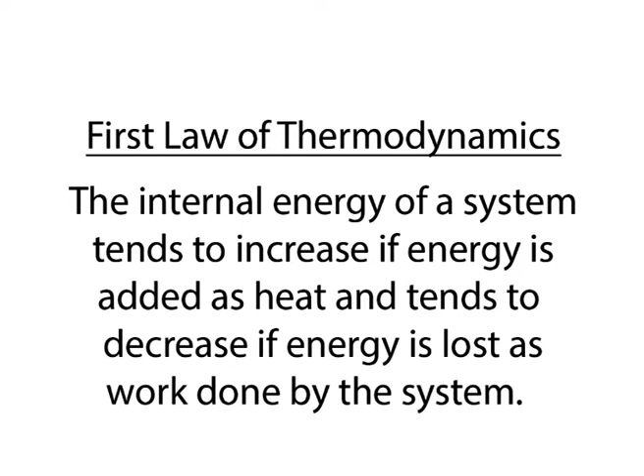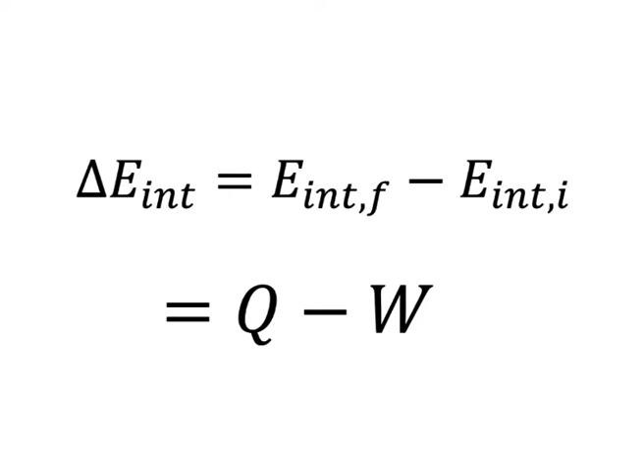In the earlier lectures, we applied the first law of thermodynamics or the conservation of energy principle to processes involving closed and open systems. It was pointed out repeatedly in those lectures that energy is a conserved property and no process is known to have taken place in violation of the first law of thermodynamics. Therefore, it is reasonable to conclude that a process must satisfy the first law to occur. However, satisfying the first law alone does not ensure that the process will actually take place.

As this example here explains, it is a common experience that a cup of hot coffee left in a cooler room eventually cools off. This process satisfies the first law of thermodynamics, since the amount of energy lost by the coffee is equal to the amount gained by the surrounding air.

Now let us consider the reverse process, the hot coffee getting even hotter in a cooler room as a result of heat transfer from the room air. We all know that this process never takes place, yet doing so would not violate the first law as long as the amount of energy lost by the air is equal to the amount gained by the coffee.

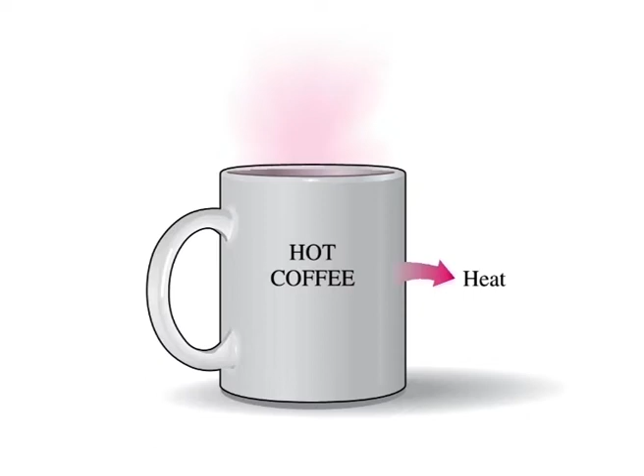In another familiar example, consider the heating of a room by the passage of electric current through a resistor. Again, the first law dictates the amount of electric energy supplied to the resistance wires to be equal to the amount of energy transferred to the room air as heat. Now let us attempt to reverse this process. It will come as no surprise that transferring some heat to the wires does not cause an equivalent amount of electric energy to be generated in the wires.

Finally, consider a paddle wheel mechanism that is operated by the fall of a mass. The paddle wheel rotates as the mass falls and stirs a fluid within an insulated container. As a result, the potential energy of the mass decreases and the internal energy of the fluid increases in accordance with the conservation of energy principle. However, the reverse process, raising the mass by transferring heat from the fluid to the paddle wheel, does not occur in nature, although doing so would not violate the first law of thermodynamics.

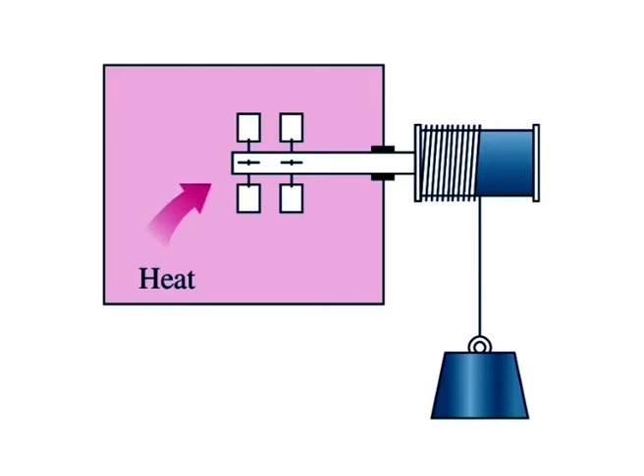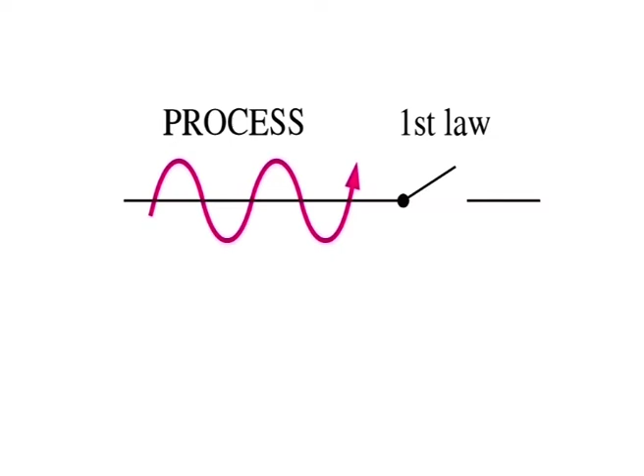It is clear from these arguments that processes proceed in a certain direction and not in the reverse direction. The first law places no restriction on the direction of a process, but satisfying the first law does not ensure that the process can actually occur. This inadequacy of the first law to identify whether a process can take place is remedied by introducing another general principle, the second law of thermodynamics.

The use of the second law of thermodynamics is not limited to identifying the direction of processes. The second law also asserts that energy has quality as well as quantity. The first law is concerned with the quantity of energy and the transformations of energy from one form to another with no regard to its quality. Preserving the quality of energy is a major concern to engineers, and the second law provides the necessary means to determine the quality as well as the degree of degradation of energy during a process.

As shall be discussed, more of high temperature energy can be converted to work, and thus it has a higher quality than the same amount of energy at a lower temperature. The second law of thermodynamics is also used in determining the theoretical limits for the performance of commonly used engineering systems such as heat engines and refrigerators, as well as predicting the degree of completion of chemical reactions.

Thermal energy reservoirs. In the development of the second law of thermodynamics, it is very convenient to have a hypothetical body with a relatively large thermal energy capacity that can supply or absorb finite amounts of heat without undergoing any change in temperature. Such a body is called a thermal energy reservoir or just a reservoir.

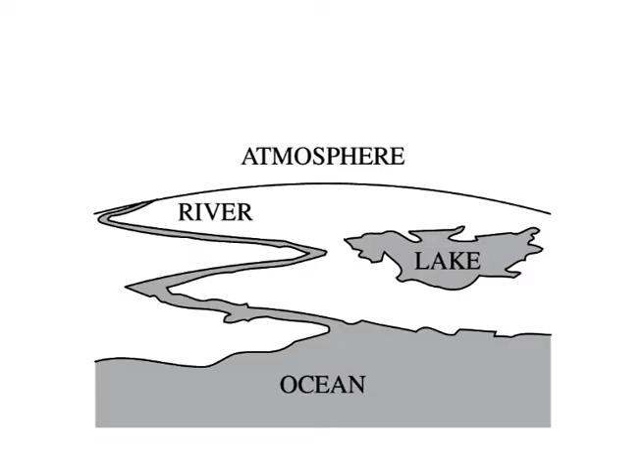In practice, large bodies of water such as oceans, lakes and rivers as well as the atmospheric air can be modeled accurately as thermal energy reservoirs because of their large thermal energy storage capabilities or thermal masses. The atmosphere, for example, does not warm up as a result of heat losses from residential buildings in winter. Likewise, megajoules of waste energy dumped in large rivers by power plants do not cause any significant change in water temperature.

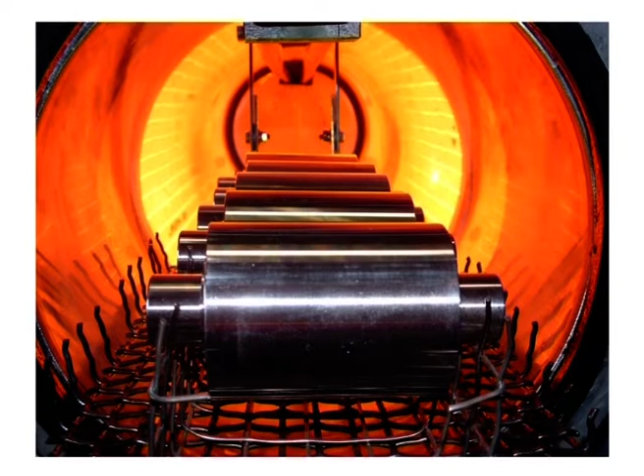Another familiar example of a thermal energy reservoir is the industrial furnace. The temperatures of most furnaces are carefully controlled and they are capable of supplying large quantities of thermal energy as heat in an essentially isothermal manner. Therefore, they can be modeled as reservoirs.

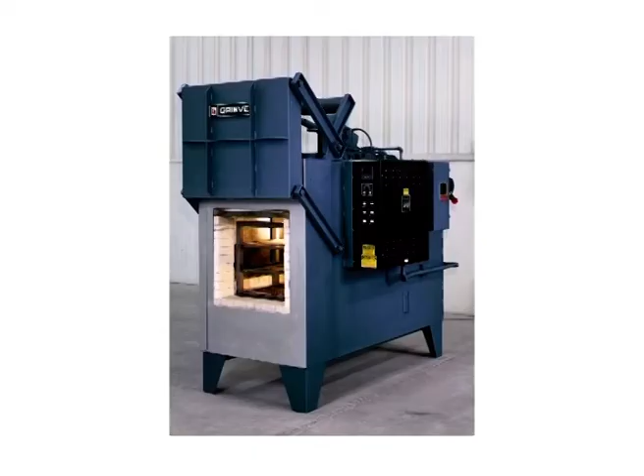A body does not actually have to be very large to be considered a reservoir. Any physical body whose thermal energy capacity is large relative to the amount of energy it supplies or absorbs can be modeled as one. The air in a room, for example, can be treated as a reservoir in the analysis of the heat dissipation from a TV set in the room, since the amount of heat transfer from the TV set to the room air is not large enough to have a noticeable effect on the room air temperature.

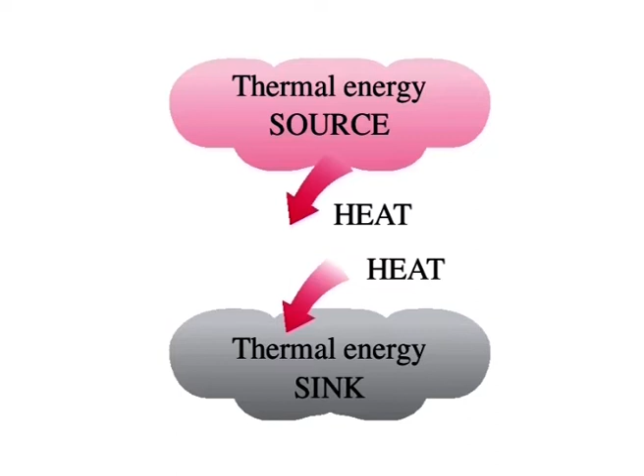A reservoir that supplies energy in the form of heat is called a source, and the one that absorbs energy in the form of heat is called a sink. Thermal energy reservoirs are often referred to as heat reservoirs since they supply or absorb energy in the form of heat.

Heat transfer from industrial sources to the environment is a major concern to environmentalists as well as to engineers. Irresponsible management of waste energy can significantly increase the temperature of portions of the environment, causing what is called thermal pollution. If it is not carefully controlled, thermal pollution can seriously disrupt marine life in lakes and rivers.

Heat engines. As discussed earlier, work can easily be converted to other forms of energy, but converting other forms of energy to work is not that easy. The mechanical work done by the shaft, for example, is first converted to internal energy of the water. This energy may then leave the water as heat. We know from experience that any attempt to reverse this process will fail. That is, transferring heat to the water does not cause the shaft to rotate.

From this and other observations, we conclude that work can be converted to heat directly and completely, but converting heat to work requires the use of some special devices. These devices are called heat engines.

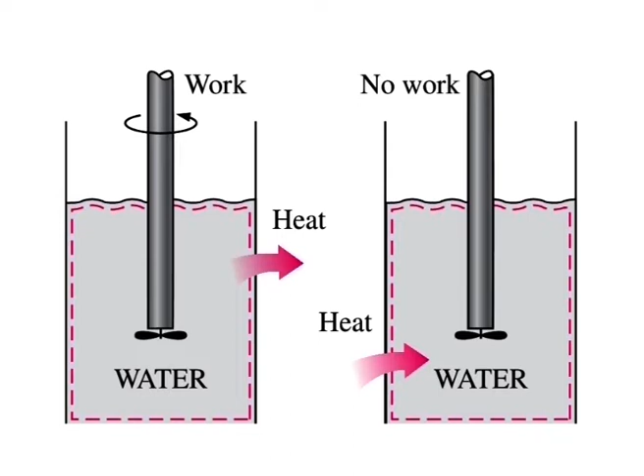Heat engines differ considerably from one another, but all can be categorized by the following. They receive heat from a high temperature source: solar energy, oil furnace, nuclear reactor, etc. They convert part of this heat to work, usually in the form of a rotating shaft. They reject the remaining waste heat to a low temperature sink: the atmosphere, rivers, etc. They operate on a cycle.

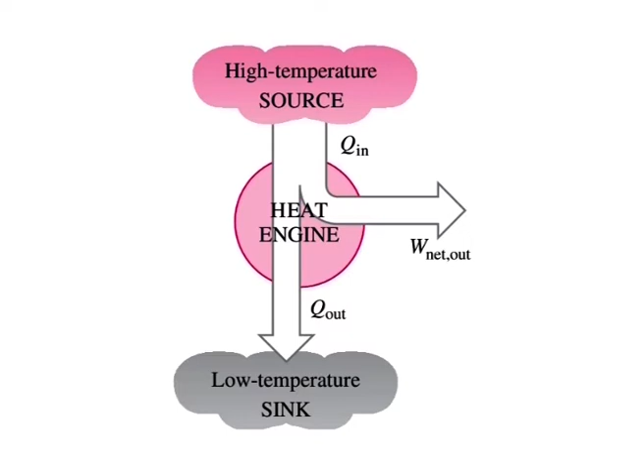Heat engines and other cyclic devices usually involve a fluid to and from which heat is transferred while undergoing a cycle. This fluid is called the working fluid. The term heat engine is often used in a broader sense to include work production devices that do not operate in a thermodynamic cycle. Engines that involve internal combustion, such as gas turbines and car engines, fall into this category.

These devices operate in a mechanical cycle but not in a thermodynamic cycle, since the working fluid, that is, the combustion gases, does not undergo a complete cycle. Instead of being cooled to the initial temperature, the exhaust gases are expelled and replaced by fresh air and fuel mixture at the end of the cycle.

The work producing device that best fits into the definition of a heat engine is the steam power plant, which is an external combustion engine. That is, combustion takes place outside the engine and the thermal energy released during this process is transferred to the steam as heat. This is a rather simplified diagram of the actual steam power plant. The various quantities shown on this figure are as follows.

Q in is the amount of heat supplied to steam in boiler from a high temperature source, maybe a furnace. Q out is the amount of heat rejected from steam in condenser to a low temperature sink. W out is the amount of work delivered by steam as it expands in turbine. W in is the amount of work required to compress water to boiler pressure. Notice that the directions of the heat and work interactions are indicated by the subscripts in and out. Therefore, all four of the described quantities are always positive.

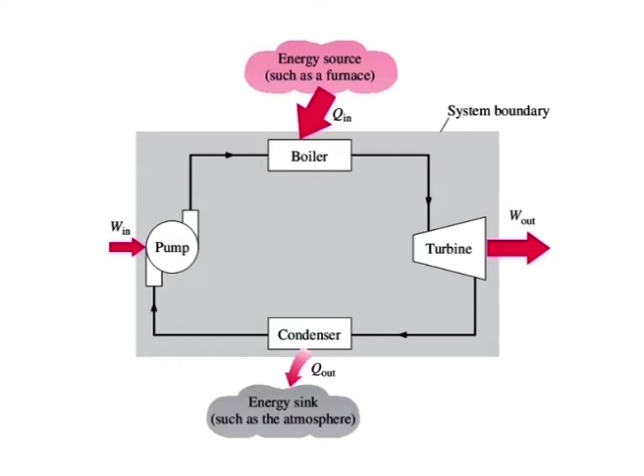The net work output of this power plant is simply the difference between the total work output of the plant and the total work input, that is, W net out is equal to W out minus W in. The net work can also be determined from the heat transfer data alone.

The four components of the steam power plant involve mass flow in and out, and therefore they should be treated as open systems. These components, together with the connecting pipes, however, always contain the same fluid. No mass enters or leaves this combination system, which is indicated by the shaded area. Thus, it can be analyzed as a closed system.

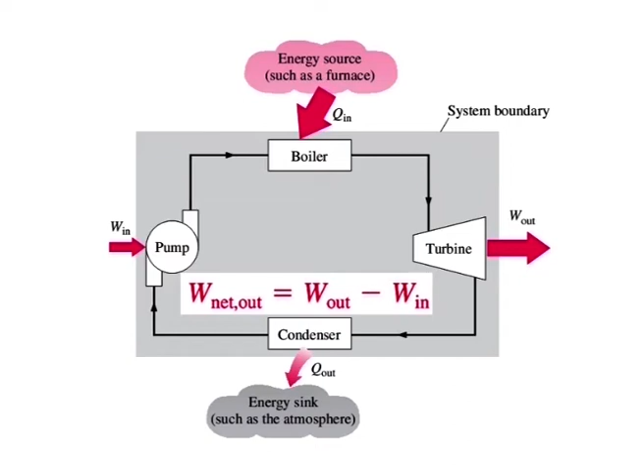Recall that for a closed system undergoing a cycle, the change in internal energy delta U is 0, and therefore the net work output of the system is also equal to the net heat transfer to the system, that is, W net out is equal to Q in minus Q out.

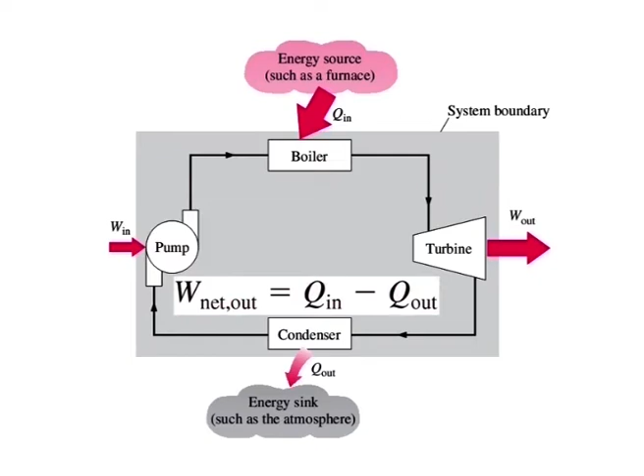Thermal efficiency. In equation W net out is equal to Q in minus Q out, Q out represents the magnitude of the energy wasted in order to complete the cycle, but Q out is never 0. Thus, the net work output of a heat engine is always less than the amount of heat input. That is, only part of the heat transferred to the heat engine is converted to work.

The fraction of the heat input that is converted to net work output is a measure of the performance of a heat engine and is called the thermal efficiency eta Th. For heat engines, the desired output is the net work output and the required input is the amount of heat supplied to the working fluid.

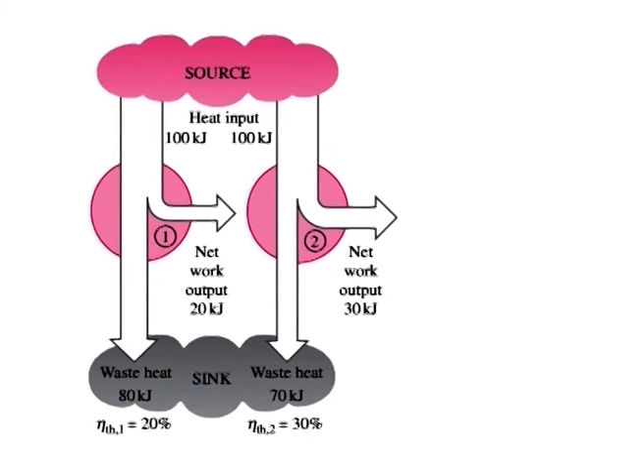Then the thermal efficiency of a heat engine can be expressed as net work output divided by total heat input, or eta Th is equal to W net out divided by Q in. It can also be expressed as eta Th is equal to 1 minus Q out over Q in, because W net out is equal to Q in minus Q out.

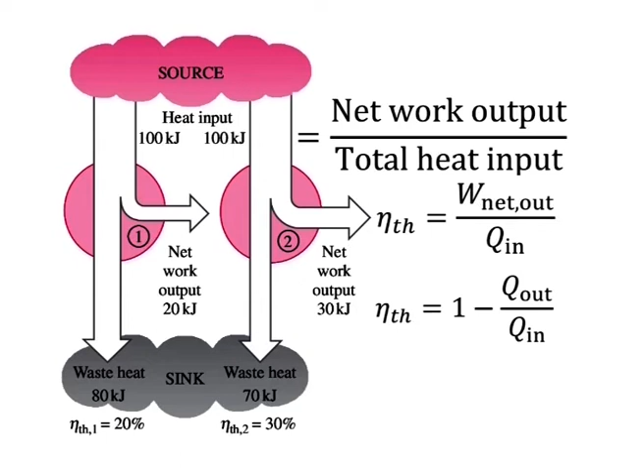Cyclic devices of practical interest such as heat engines, refrigerators and heat pumps operate between a high temperature medium or reservoir at temperature TH and a low temperature medium at a temperature TL. To bring uniformity to the treatment of heat engines, refrigerators and heat pumps, we define two quantities, QH and QL.

QH is the magnitude of heat transfer between the cyclic device and the high temperature medium at temperature TH. QL is the magnitude of heat transfer between the cyclic device and the low temperature medium at temperature TL. Notice that both QL and QH are defined as magnitudes and therefore are positive quantities. The direction of QH and QL is easily determined by inspection.

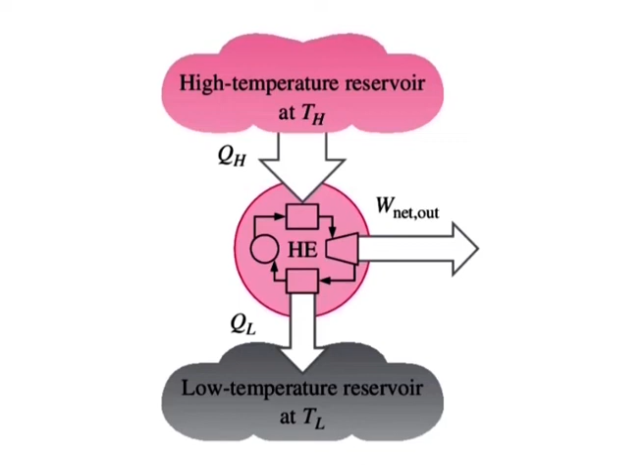Then the net work output and thermal efficiency relations for any heat engine can also be expressed as W net out is equal to QH minus QL and eta Th is equal to W net out divided by QH, or eta Th is equal to 1 minus QL upon QH. The thermal efficiency of a heat engine is always less than unity, since both QL and QH are defined as positive quantities.

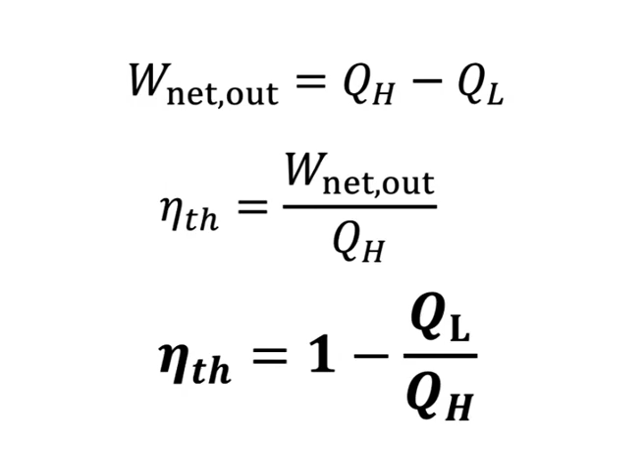Thermal efficiency is a measure of how efficiently a heat engine converts the heat that it receives to work. Heat engines are built for the purpose of converting heat to work, and engineers are constantly trying to improve the efficiencies of these devices, since increased efficiency means less fuel consumption and thus lower fuel bills and less pollution. The thermal efficiencies of work producing devices are relatively low.

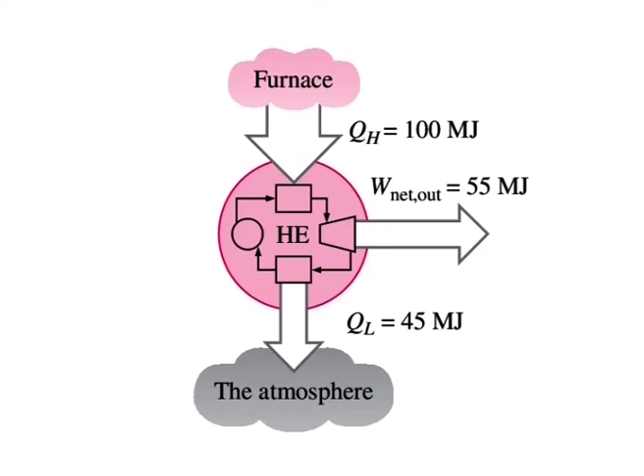Ordinary spark ignition automobile engines have a thermal efficiency of about 25%. That is, an automobile engine converts about 25% of the chemical energy of the gasoline to mechanical work. This number is as high as 40% for diesel engines and as high as 60% for large combined gas steam power plants. Thus, even with the most efficient heat engine available today, almost one half of the energy supplied ends up in the rivers, lakes or the atmosphere as waste or useless energy.

So friends, here we come to the end of our discussion and therefore we sum up. The second law of thermodynamics states that processes occur in a certain direction, not in any direction. A process does not occur unless it satisfies both the first and the second law of thermodynamics. Bodies that can absorb or reject finite amounts of heat isothermally are called thermal energy reservoirs or heat reservoirs.

Work can be converted to heat directly, but heat can be converted to work only by some devices called heat engines. So that is it for today. In the next lecture, we shall be discussing Kelvin Planck's statement, refrigeration and heat pumps.